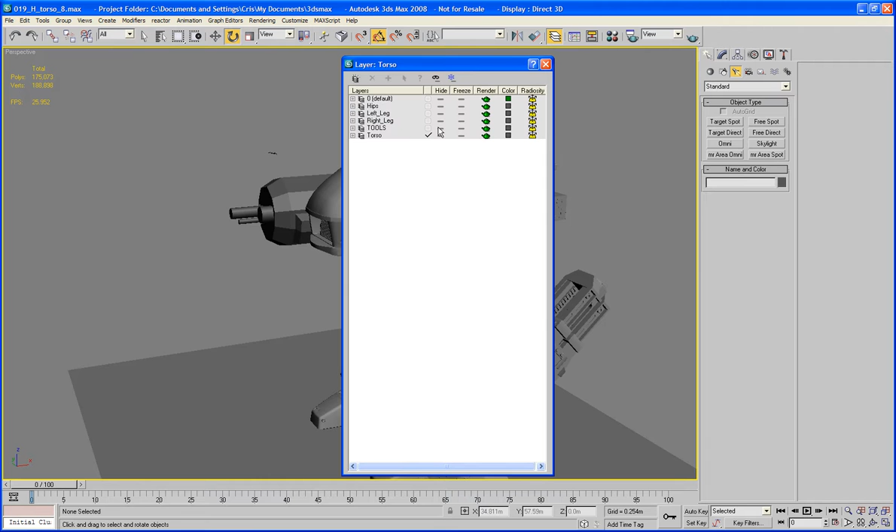Right, what I'm going to do is get started over here on the shoulder mount. For this, I'm going to need tools and the torso, so I'll just hide everything else.

Now these shoulders are probably going to get in the way, but I can just rotate them up and out of the way. I'm just going to work on this one anyway. There we go, now I've got plenty of space.

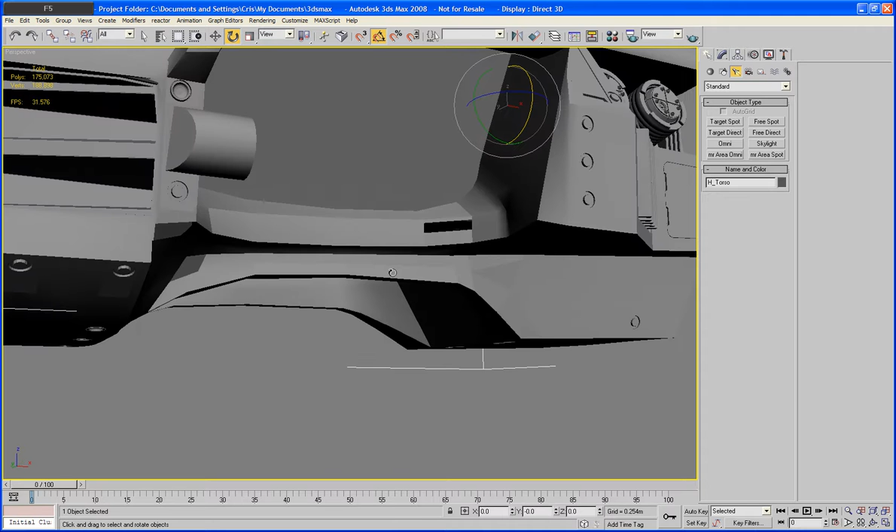Now, a couple of duff polygons in here that I want to fix. So I'll go there, cap it. Bet there's one on the other side too, let's have a look.

Huh, uncanny, there isn't. Okay, what else have we got here that might need fixing while I'm having a quick look around? Surely that can't be it. Oh well.

Now let's do a Control A and see where the red lines are. Well, there's one, and there's one for some reason. Ah, see, look, let's just cap that off.

3dsmax is being a little bit unresponsive at the moment, but it is a very heavy mesh, so... Okay, cap there.

Okay, now inside here... Ah, look, seems to have been an edge accidentally destroyed there as well. Just bridge that.

Okay, now what I need to do is go from here, which I'll cap, and extrude all the way to the other side.

Bring it across, well, to around about the optimal height, which is...

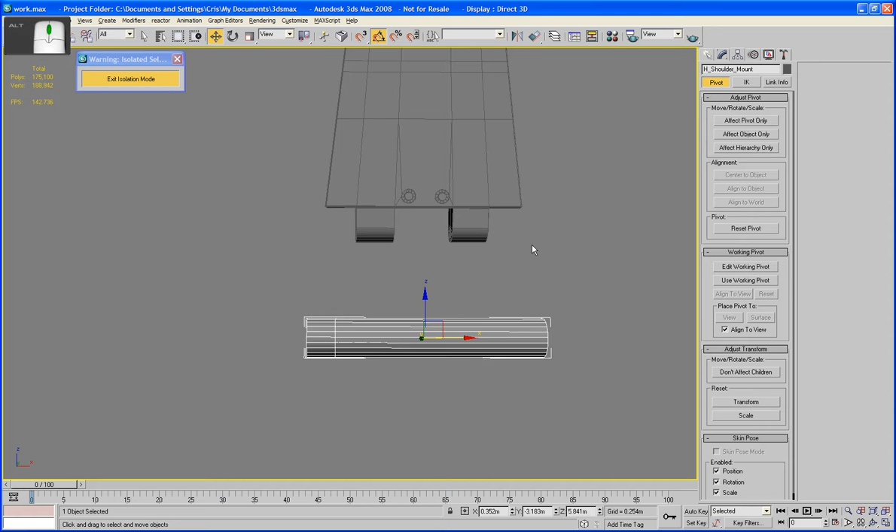Right, now I'm going to get rid of that there, do a backspace, get rid of these as well. There we are. Okay.

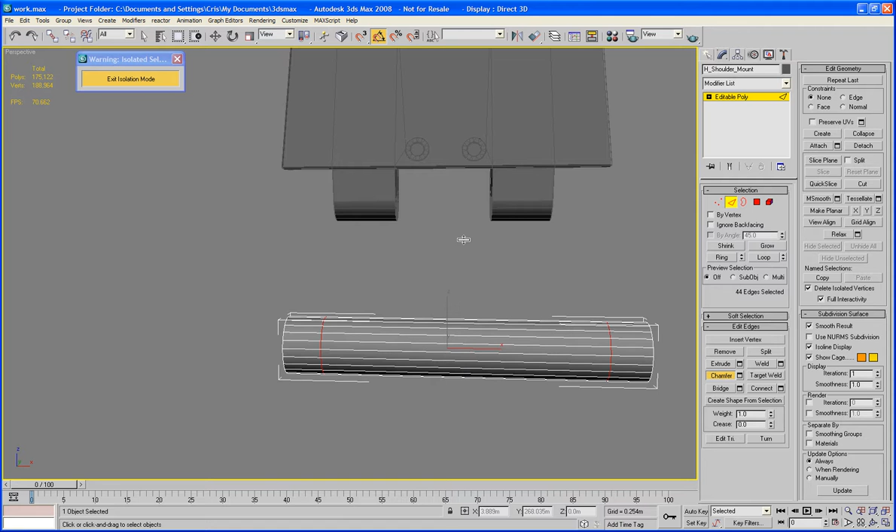Straight to the middle, connect, chamfer. Going to move these to about there.

Grab this, making sure ignore backfacing is on now. Extrude by local normal. Start bringing it in.

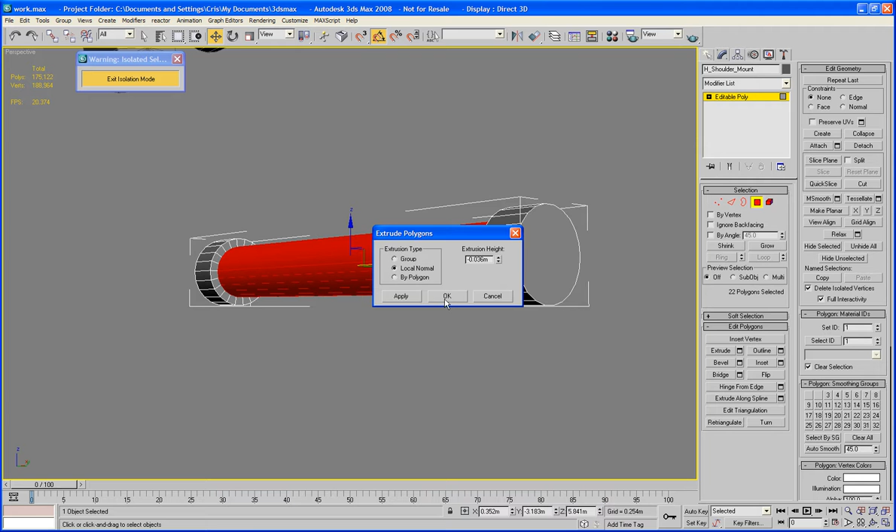About that far should do it. Click OK. Right.

Now it's a very complicated shape, this one, because some engine shapes and some mechanical shapes are pretty complicated. So I'm going to try and break it down as best I can.

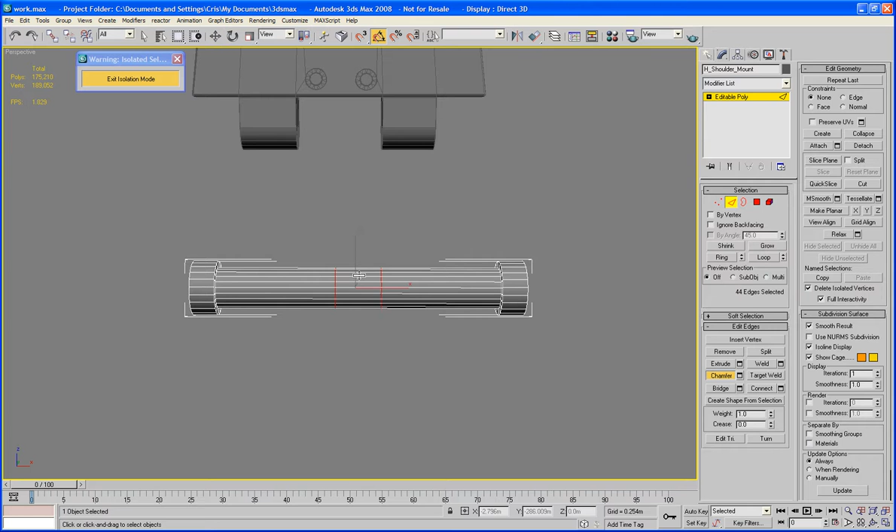So I'm going to grab that and do a connect, then chamfer it wide just to get to the kind of edge of where I'm going to be working from, which is our shoulder. So it's going to be about this wide.

Now I'm going to take out the middle part, and then over here I'm going to kind of work in symmetry really. I'm going to pull this part up to round about there. Click OK.

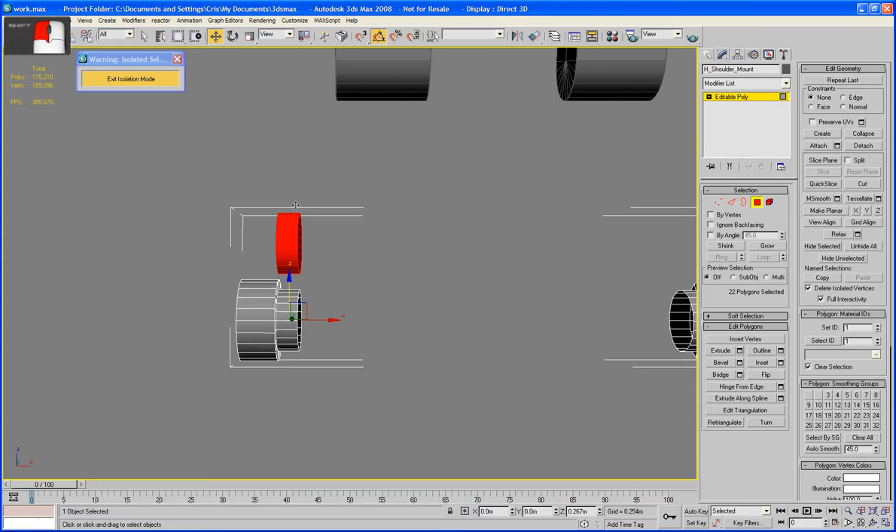Same again on the bottom. Click OK. So we've got these elements now.

Now I'm going to want to attach these elements together, which I can do via these polygons, like so. And then again the same one at the top.

Actually, let's bridge the bottom ones first. There we go. Now do the top ones. Okay, click bridge.

Now I can delete these off. Oops, wrong one. Okay, so already we've got this quite complicated shape going on there.

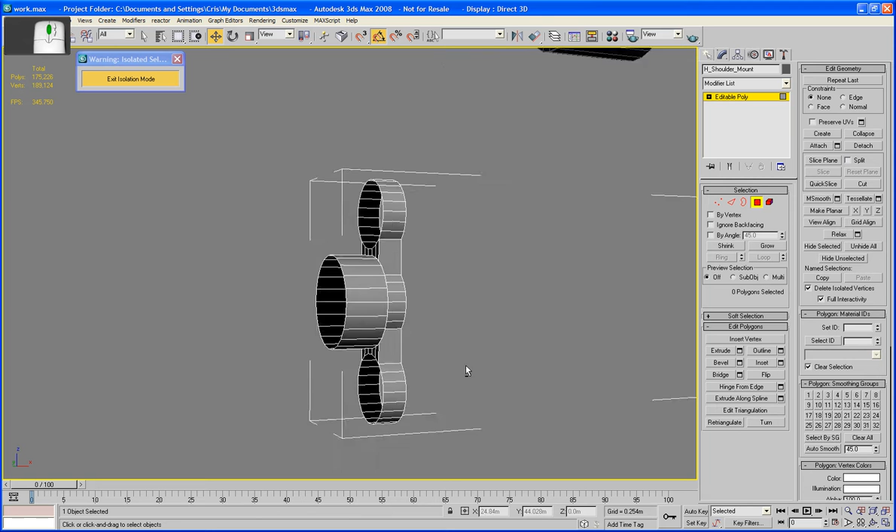Right, next. Just having a look at this. Go straight to the middle, do a connect. Straight to the middle here, do a connect.

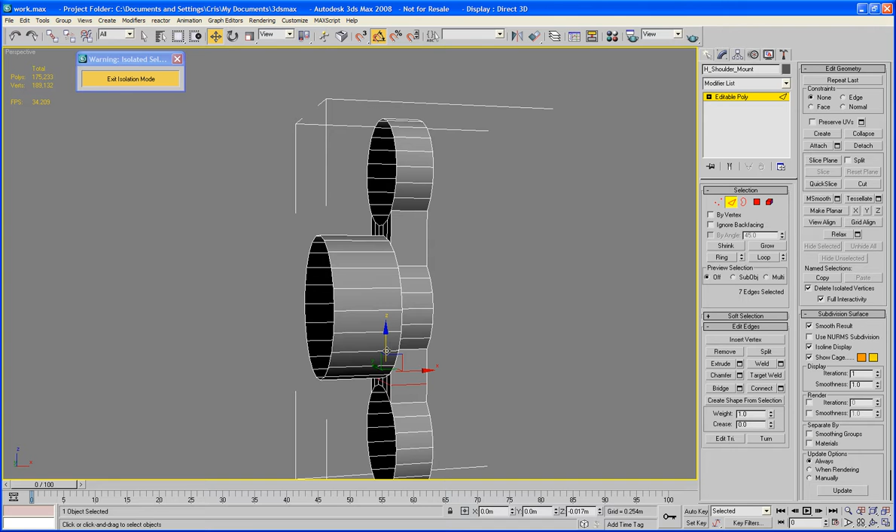Before I do, move this one down like that. Right, and that.

Now, grab these top ones and bottom ones, bring them back a little bit, like so. And line these all up together, so do that.

Okay. So we've got this shape now already.

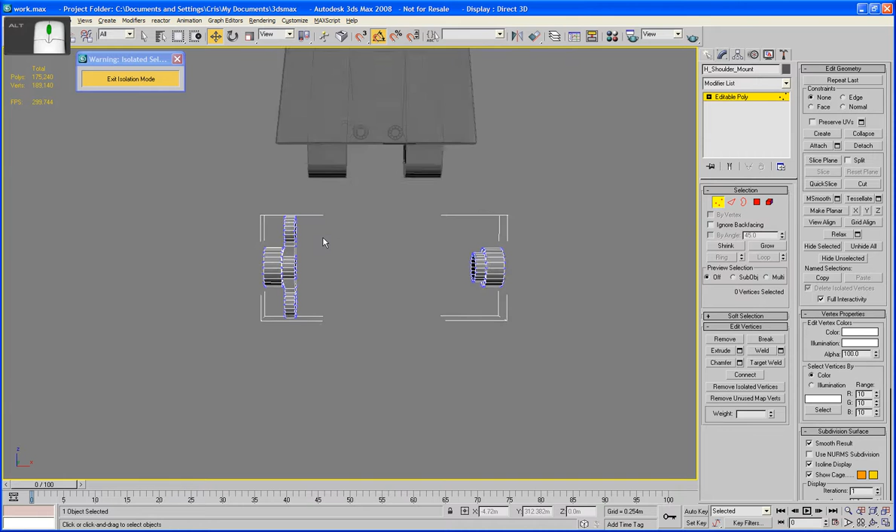Now in the middle of this we're going to have a gigantic cylinder disc, so I'm going to flatten this out, scale it on one axis like that, and then I'm going to build my large cylinder and just bring it out like so.

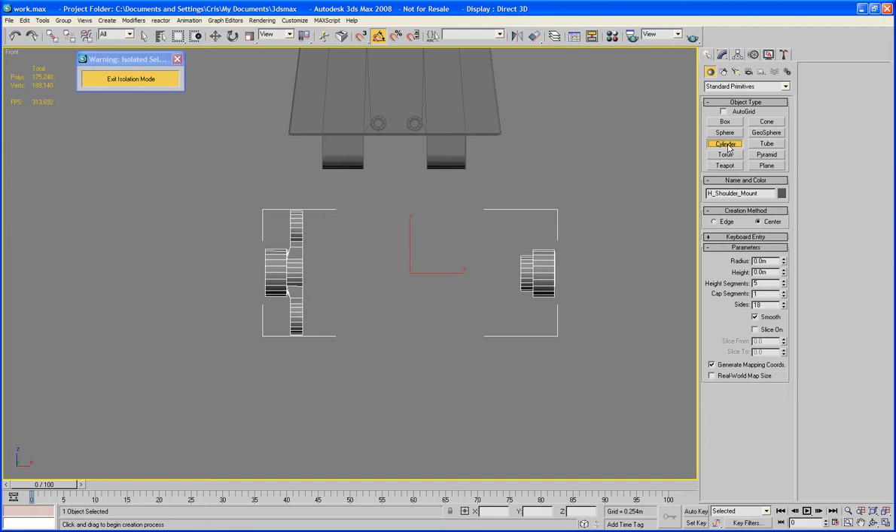Just need to get it round about the right kind of width. It's about there. Okay.

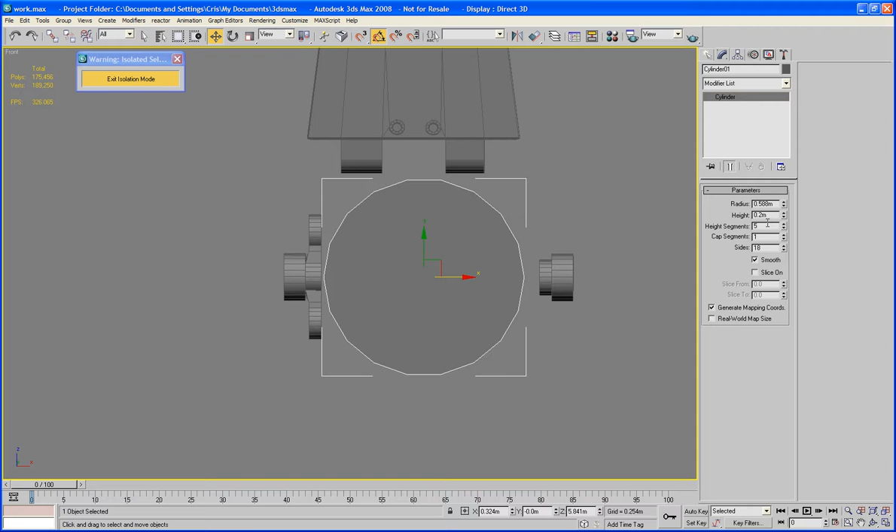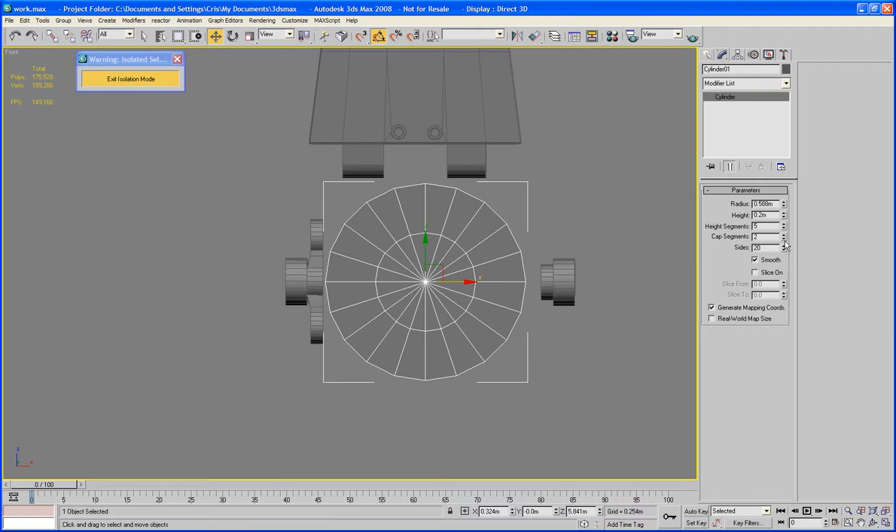I'm turning on cap segments briefly because if I take this down to 10 just to show you, there's going to be 10 bolts in this, and we're going to want an even space in between each. So if I make this 20 segments for the moment rather than 18, it'll be a lot easier for me to do this. I'm not going to bother with the cap segments right now, but I'm going to bring height segments down. I could up this to 30, but I think 20 will be okay for the moment.

Okay, drop into perspective and zoom. Bring that over to about there. I'm just going to work on the front for the moment. I can attach in the sides soon, but I'm not going to do it yet. Okay, this is in the right position as far as I'm concerned.

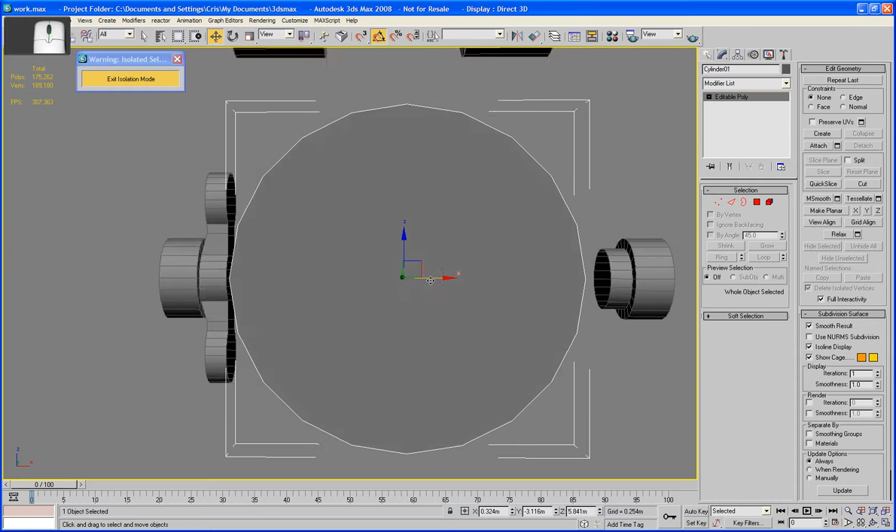So I'm going to get rid of the back piece. That'll leave me just this one. And I'm going to line it up. If you look, that vertex there is going to line up with that point there, like an arrow. I'll just put it there. See?

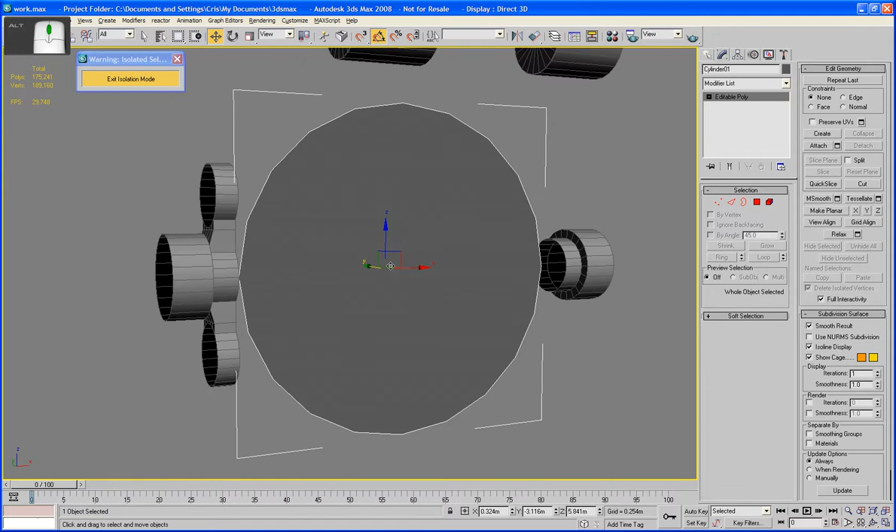Okay, now with this basic outer part here done, what I'm going to do is pull in an inset, not too far, just a nice basic one like that. Then I'm going to put a secondary inset in like this. Okay, that's cool. Right.

I'm going to rotate this. I need to rotate it 7.5 degrees really, I think. Let's have a look. Actually, I can probably just... there, look, 35 degrees will do it. Yeah, 35 degrees did it fine.

Okay, I'm just going to move this up a little bit, because I was going to get these to connect on the points, but, you know, I'm fickle. I'm not now. So ignore what I just said and taught you all about. What a terrible teacher you're thinking. Right.

Now what I'm going to do is grab this a bit like a cog. Okay, and I'm going to basically bevel this up.

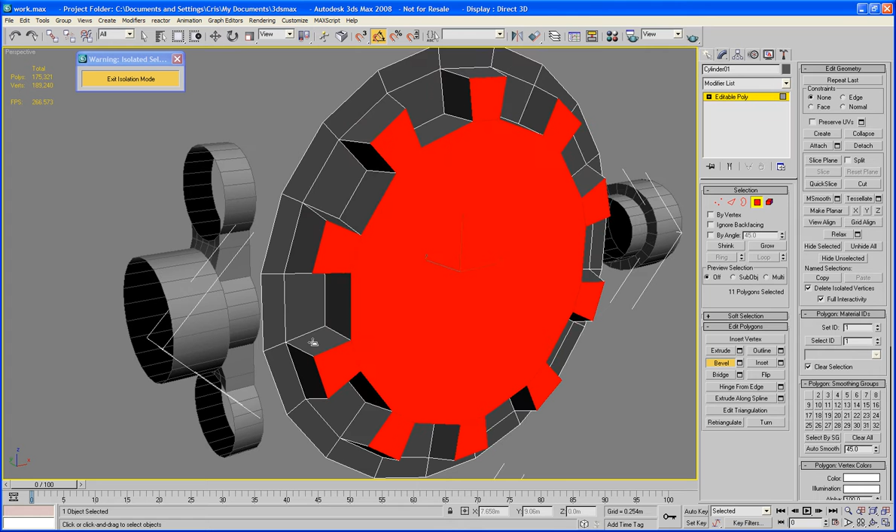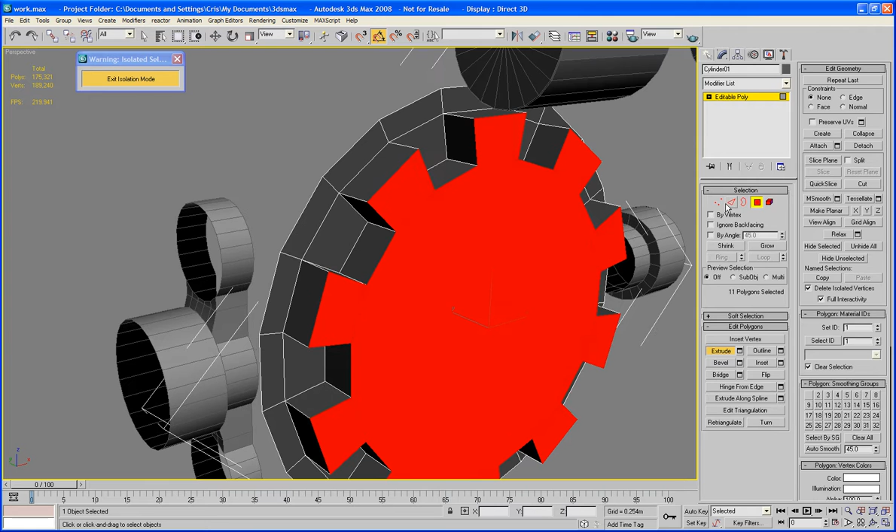Now, if you look, I'm getting that inset there, which really I don't want. So what I'm going to do instead is extrude it straight up like this. And then I'm going to manually chamfer these edges, and that'll give me the kind of curve that I want on these parts.

Before I do, I'm going to bring this entire section here up as well, while I think about it. Okay, make sure these are all selected. I don't need to chamfer them too much, although I probably will anyway, because you know what I'm like. Okay, one last chamfer, just a little one. There we are. Oops, that's segments.

Yay. No, I'm not going to do that really. Incidentally, if you're wondering, I'll just try control and Z. There we go. If I do my chamfer like this, okay, and put my segments in, I can also smooth it this way.

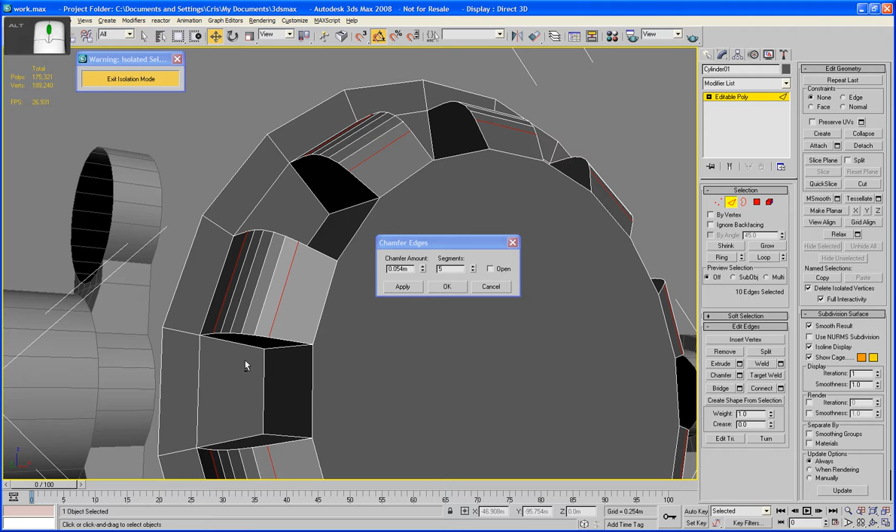I've been doing it the other way because some variations of Max don't allow you to. So if you want to do it this way instead, you will obviously get a more even result. You're going, I can't believe he's waited until part 18 to show me that all my chamfers are so uneven. Yeah, well, now you know, okay?

Right, we're going to be putting some detail parts inside those as well. But first, I'm going to finish off this part. So a bit of bevel, just to there. I'm going to edge loop it just there, like that. Okay, bring it back in a little bit, and then out like that.

Like that. Okay, because I don't need the inside piece at all, really. We're never going to see it, so, you know, ha. Okay, now I'm going to do an edge check on this. But first, I'm going to add my tools.

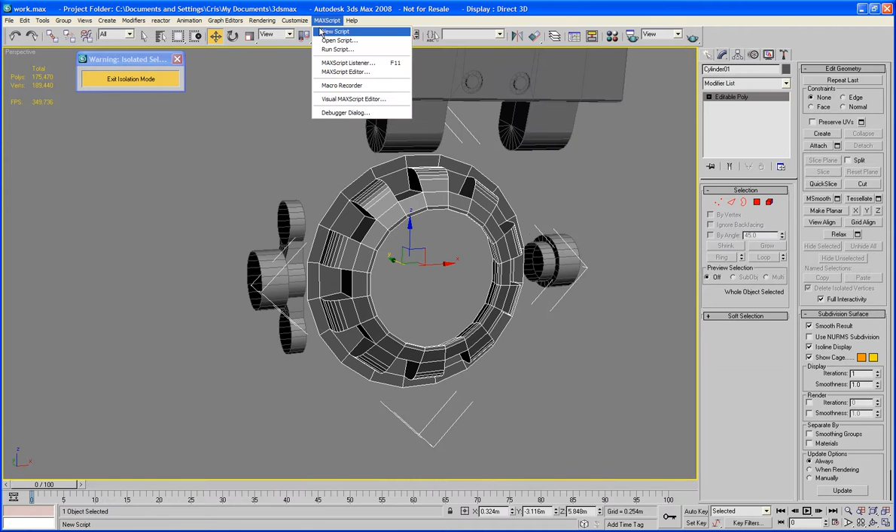So, Max script, run script, projects. Here we go. Exit isolation mode a moment. Just hide this one. There's our things over there. Hide this as well.

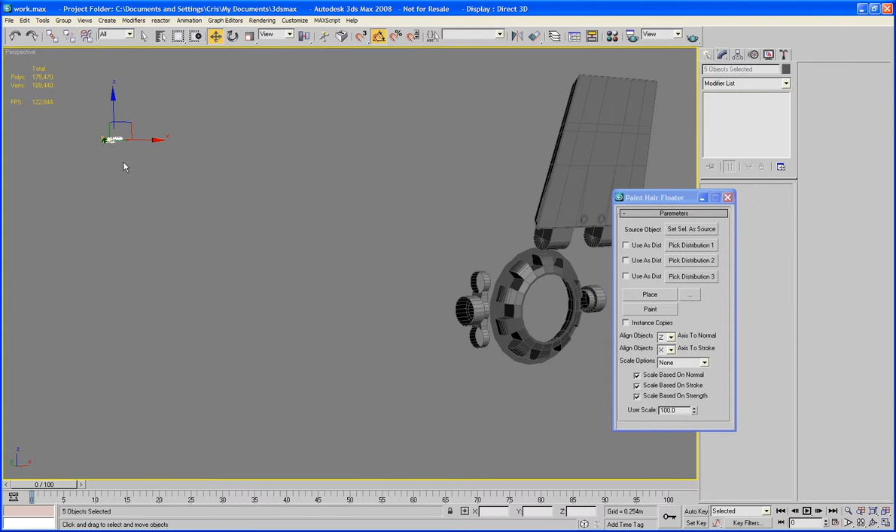And I'm going to be using... I think I'll use this one actually, I quite like it. So, pick distribution object 1. But just in case it's the wrong size, I'll use this one as well. There we go. Right, now back to this piece over here.

And I'm going to set selection as source. Right, this is one of those moments where I paused for about 45 minutes to an hour because I had to do something quickly. And now I've got to remember where I was, but it's not hard. Right, so this is my source. I'll go into place and see how big these bolts I'm making are. Hey, they're nice, they're just the right size. And put them in the middle, all these.

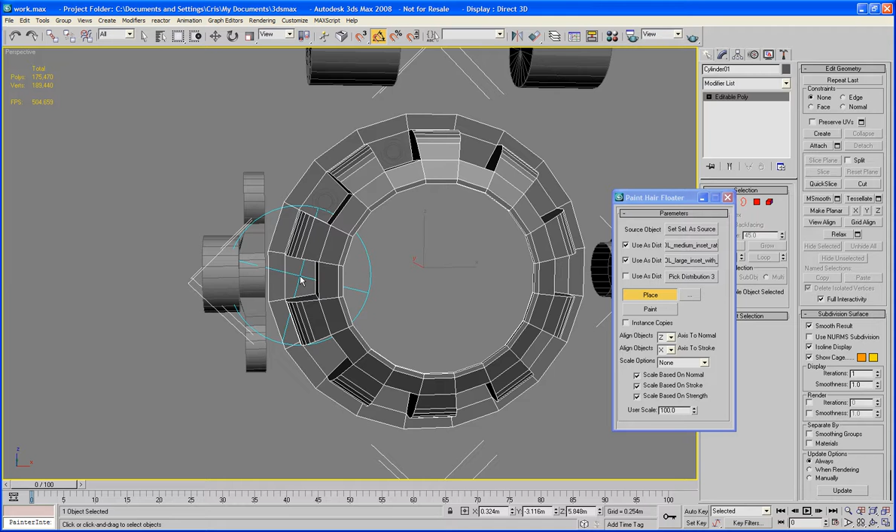Like this, and here. There we go. And then I'll turn off the placement tool and just minimize it.

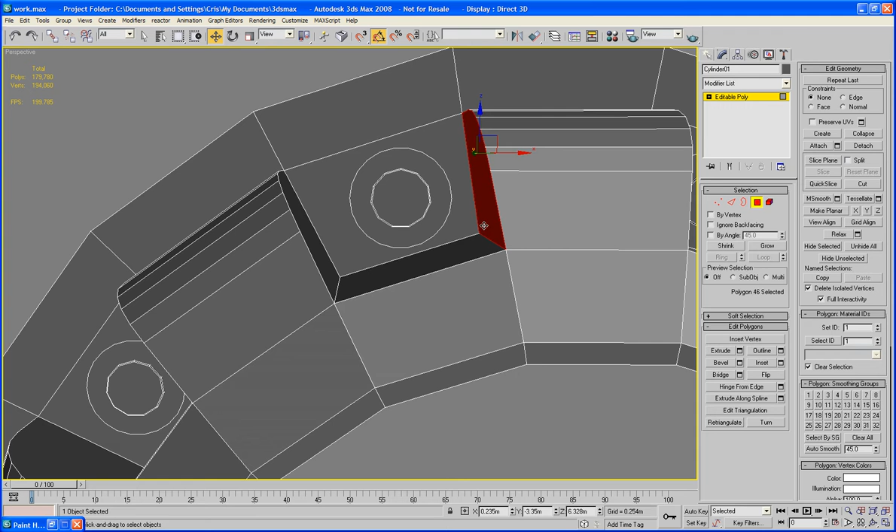And now, using the power of attach. 3, 4, 5, 6, 7, 8, 9, 10. Okay. Come on, delete, you rascal. And now I can bridge that.

And that. Have I got two objects here? It looks like I've actually placed two. Yep, I did. Placed two on top of each other.

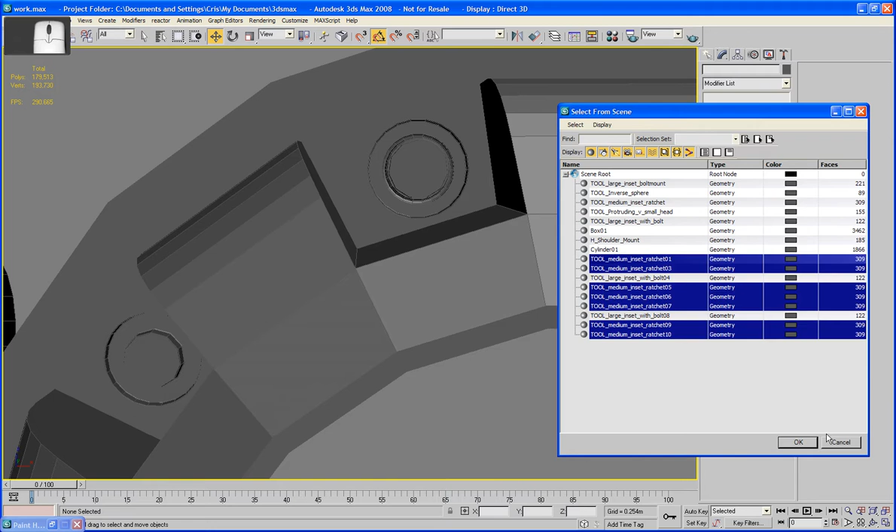In fact, I think I have my placement tool set so that I've put all these blooming ratchets in by mistake. So ratchet, ratchet, ratchet, ratchet. Yeah, I have. So let's detach these.

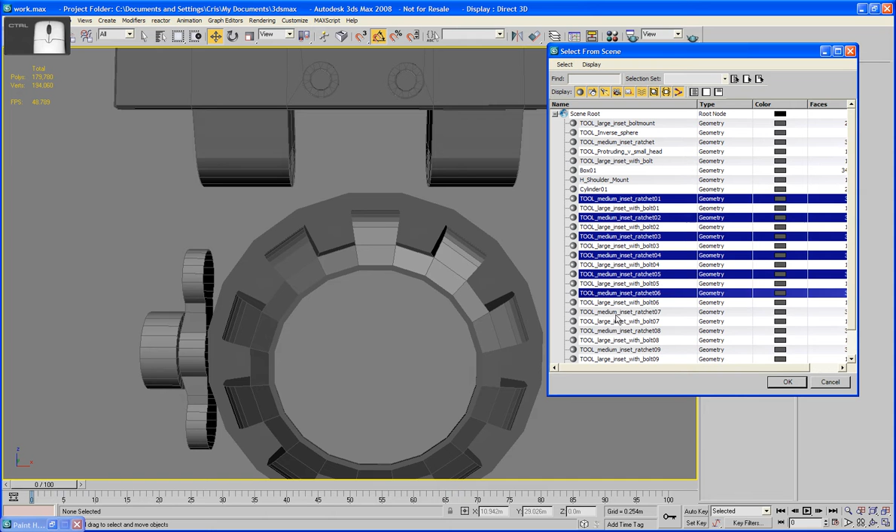Okay, H. And decide which one I'm going to keep. I'm going to keep the inset with bolt, I think, rather than all these ratchets. There we go. Get rid of those. Right.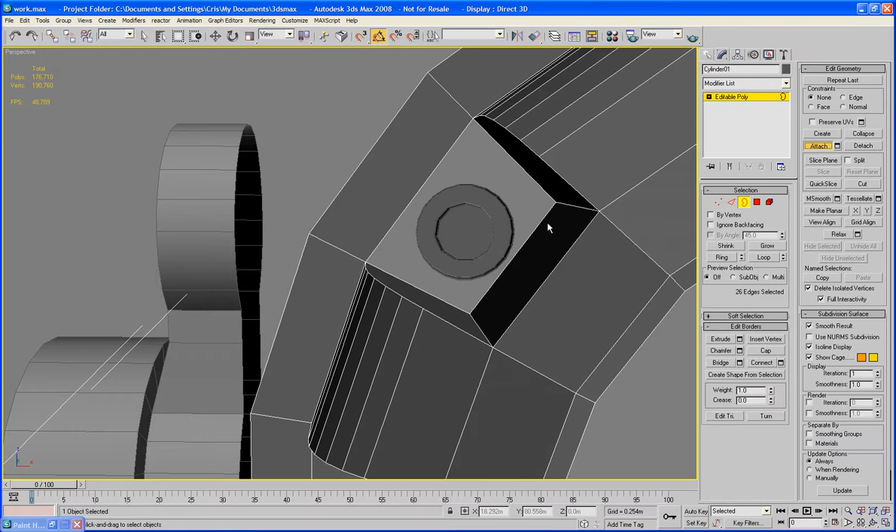And bridge. Do the same again over here, and I'm just going to start using a few shortcut keys. Not many though. Bridge that. It'll only take me a minute to do this.

In fact, I'll do all the deletion first, and then I'll do all the attaching. There we go. Okay, bridge.

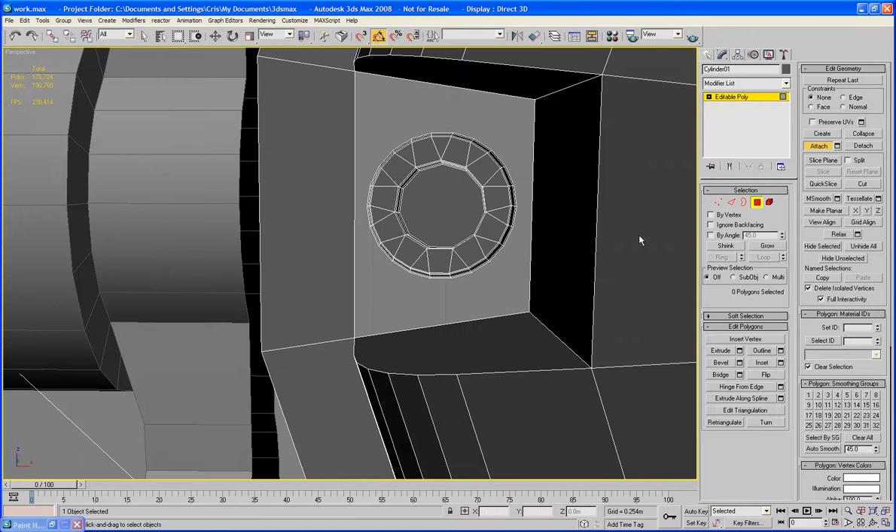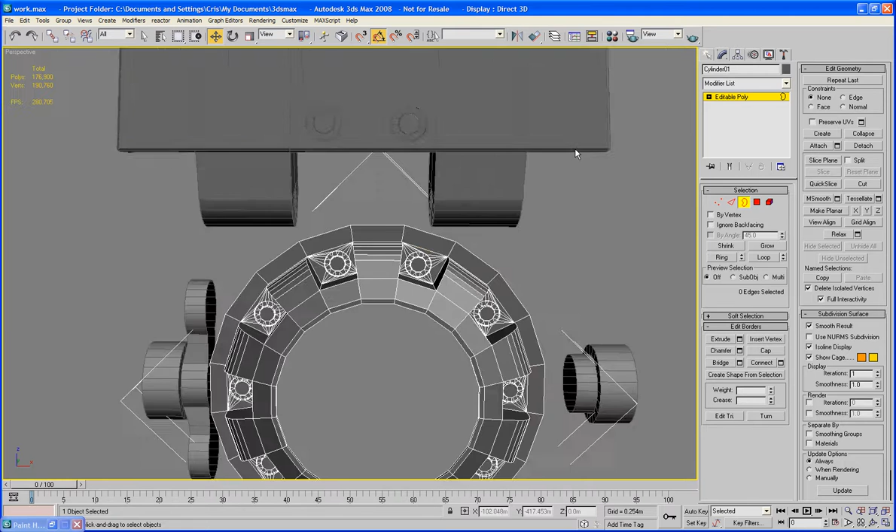Nearly done. It does speed up our process doing it this way though. Okay, zoom and have a good look at it. Yep, that's quite nice. Attach our basic material to it.

And then I'm going to do a quick EdgeChEx on it. So I'll do a quick save as well. Okay, and EdgeChEx.

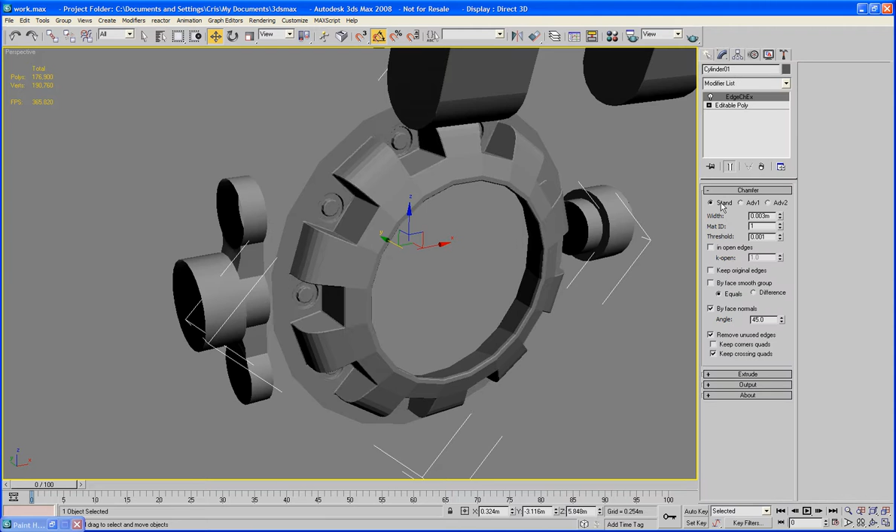Now I'm not going to use the advanced, I'm just going to use the standard. 45-degree face normal. I'll just reduce the width on them a little. There we go. A little bit more. There, that should do it.

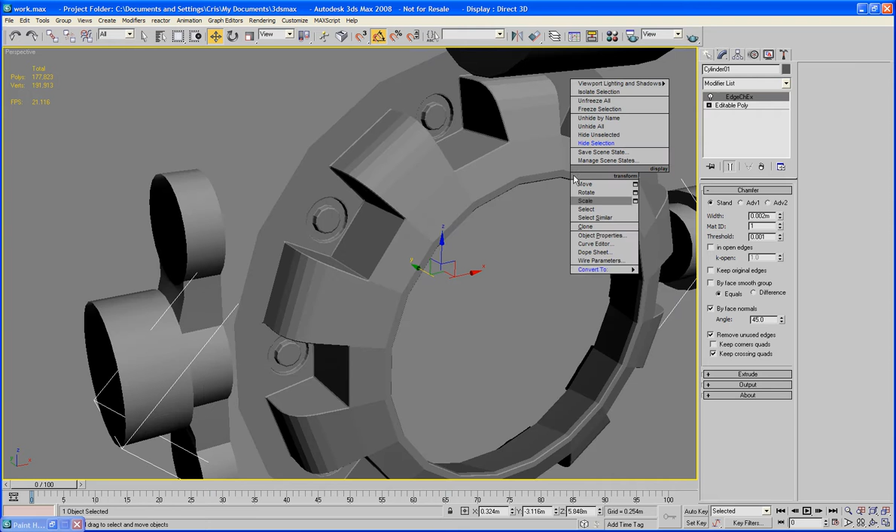Collapse that out. Now we've got this nice shape here. So what I'm going to do, bring that to there, maybe just a tiny bit more. Okay, next.

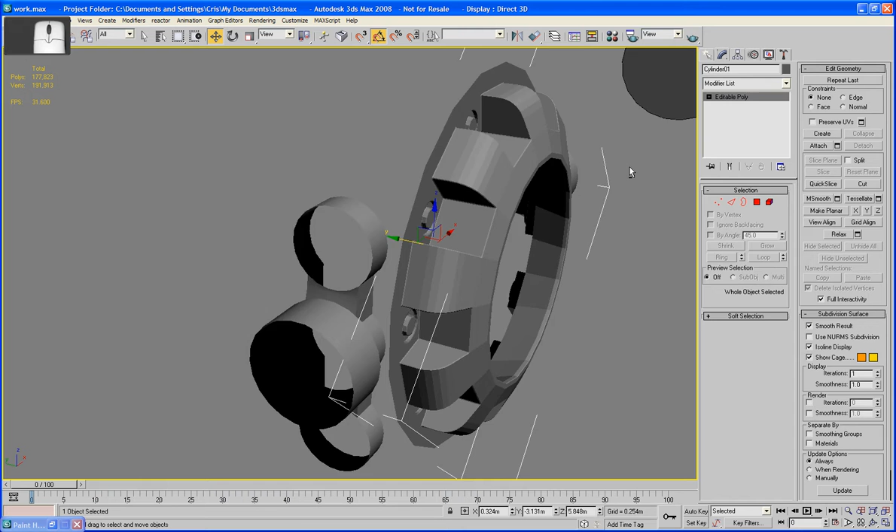I'm going to commit this to symmetry. That is that. It's been a long day, so bear with me. Okay, and do that on the Z-axis.

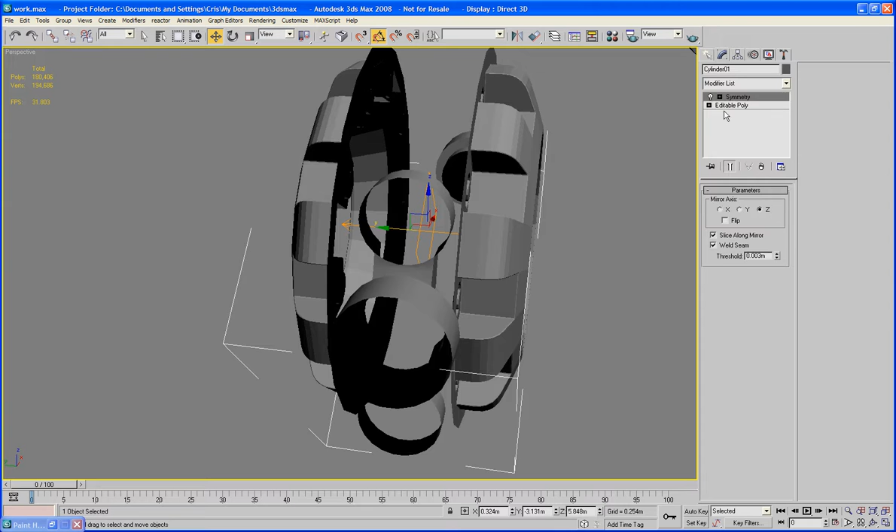Now, I thought I'd moved this. Oh no, I have, that's okay. Okay, so let's bring this in a bit. Just about there.

Convert to editable poly. And now I can bridge these two together. Like that.

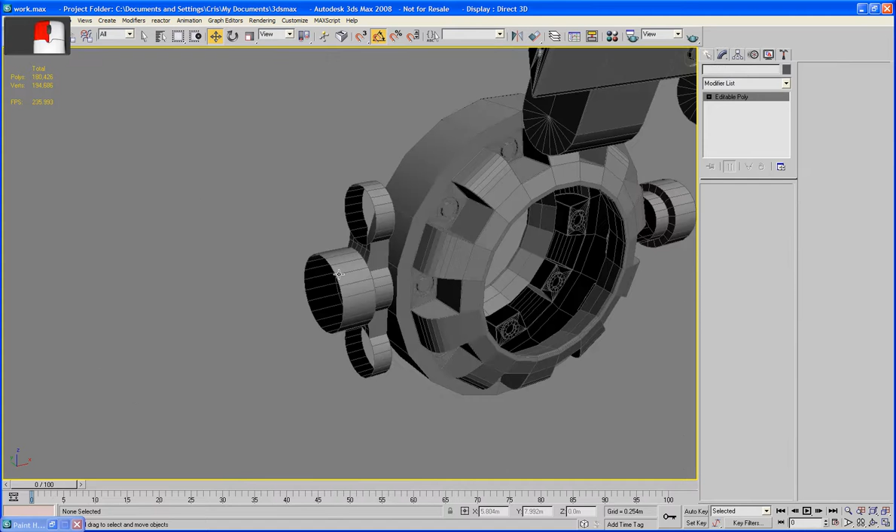Okay, now I want to basically sink these parts in. So what I'm going to do is attach it this way rather than the other way, so I keep my pivot nice and central.

First I'm going to move this one. Just to the point where it intersects, which is about there. Okay. Now,

Have a look at this. Yeah, I think this is actually going to work surprisingly well, so I'm quite pleased. Front viewport and zoom.

Now then you see this part here, so what I'm going to do is run a connect through this and just slide it down to around about there. Slide this one down as well. Okay.

Now I'm going to bring these across one at a time just so they intersect in. Bring this one to there. And just keep them going basically all the way through to here.

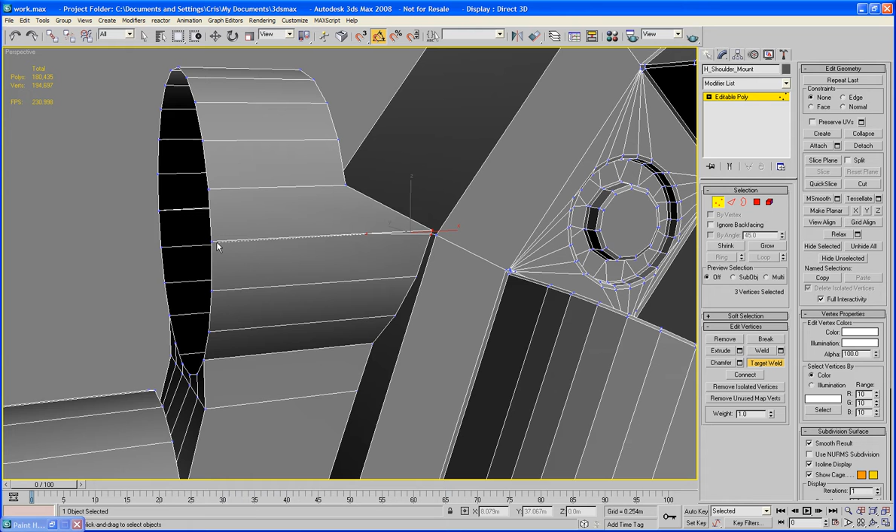Right, I'll go to my target weld. There we are. Right, now I can zoom right in on this again.

Okay, let's move this in. There we are, and this one as well. By doing this, you see, we break up this polygon rather successfully, which means it'll bend into the right position. Like so.

Let's move them all at once, actually. There we go. Just deselect it as it goes into contact. Oops, wrong way.

Gonna have to do the thing again for the bottom, so there we go. And this one. There we go. So those are lined up nicely now and the way that I want them. So now I get to do the same again down here.

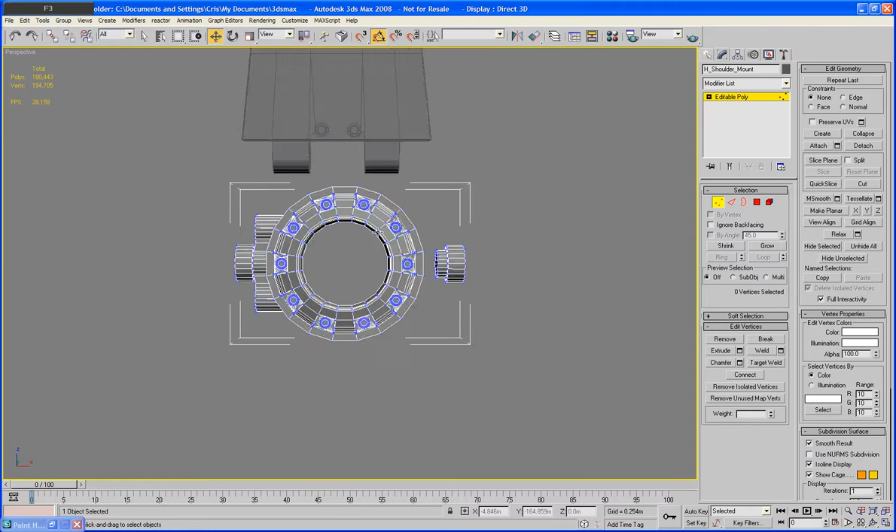Right, as you can see, we've put these pieces now where they need to be, and we've still maintained the shape, which is good.

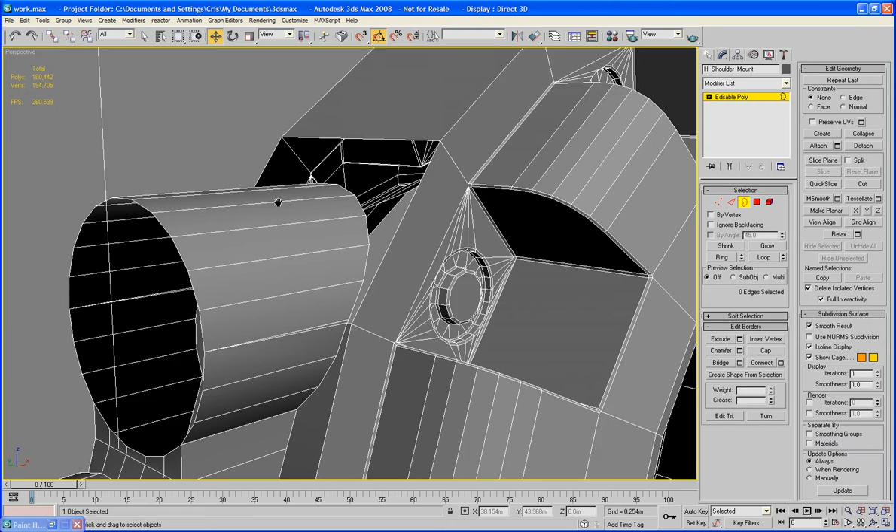So if I delete this, I can then... you see this won't select by cap yet. I can then, let me see, grab here and here, and bridge it. And I think I'll target weld this one out, actually.

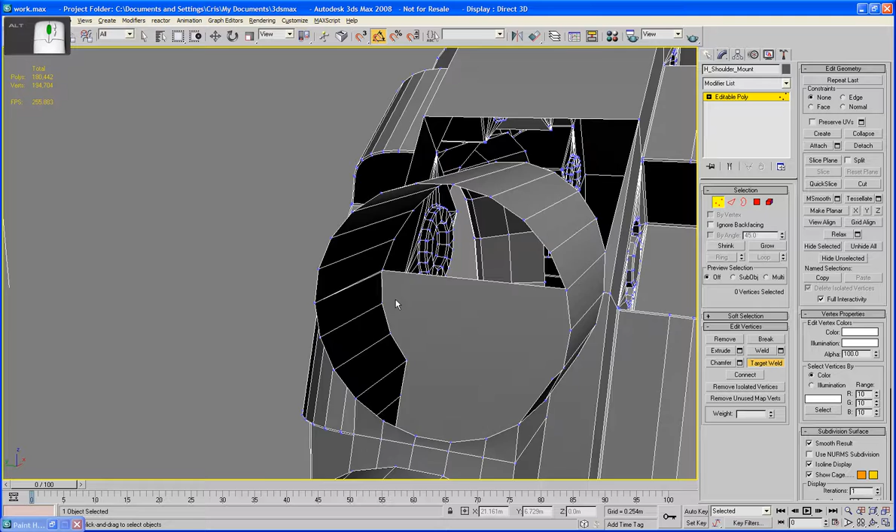Wasn't going to, but I think it's so minor it's not going to be noticed. I'll do the same here. Okay, and bridge there. Because that's bridged, I can now cap this out. Okay, so that's connected in nicely and solidly.

Now I'll delete this one out. And again, I can use the same method, just here to here. Now, that one intersects a bit too much, which is no use, so we'll do it from up here instead, because we don't want that level of intersection across polygons - even though it looks neat, it isn't.

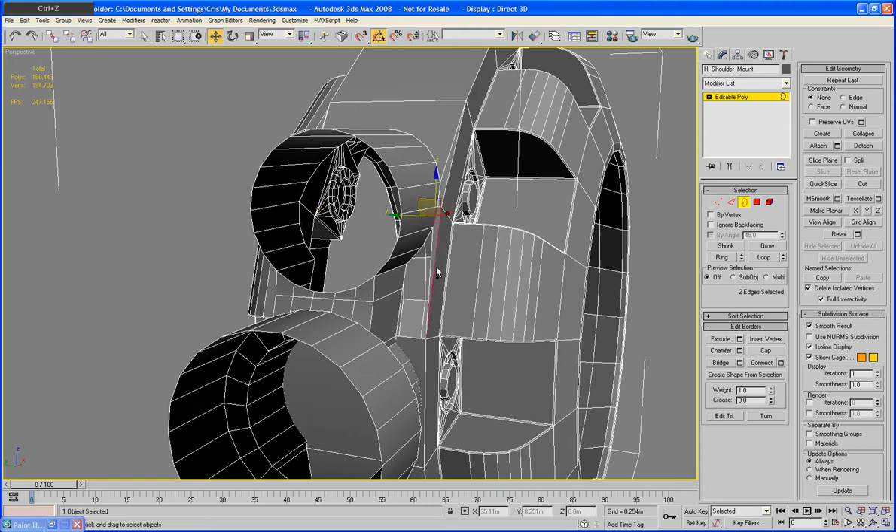There we are. Okay, let's cap these two. And it's gone right the way through, which is something it shouldn't have done. So let's undo these two and try to work out why it's doing that. I'd really rather it didn't. Ah, right, it's because this part here isn't bridged, so I'm just being dim.

The easiest way to fix that will be to do a cut from here to about here, same on the other side, and that'll stop our intersections going on. Okay, bridge.

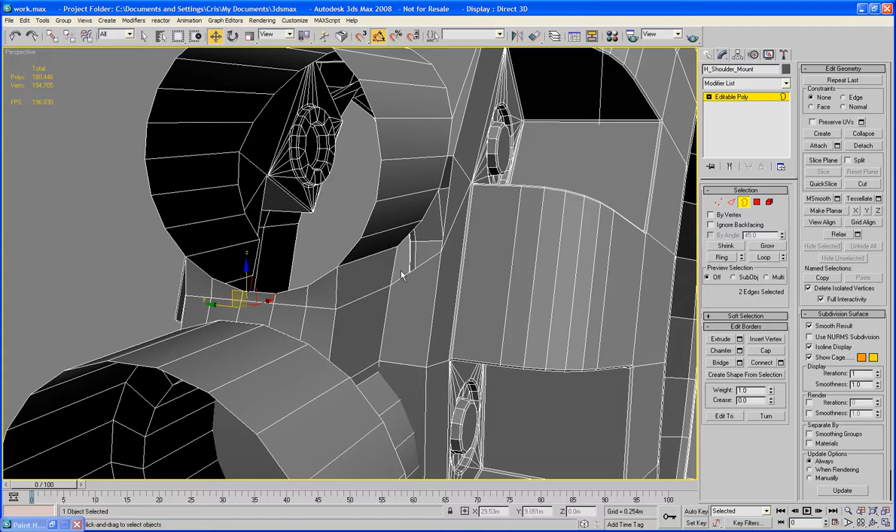And bridge. If you realised that was going to happen, then you're a smug git. Okay, bridge there, and bridge there. Hang on, not bridge there at all. You see, you didn't tell me again, did you? You're like, Cris, you're making a mistake, and I didn't realise. Okay, cap there.

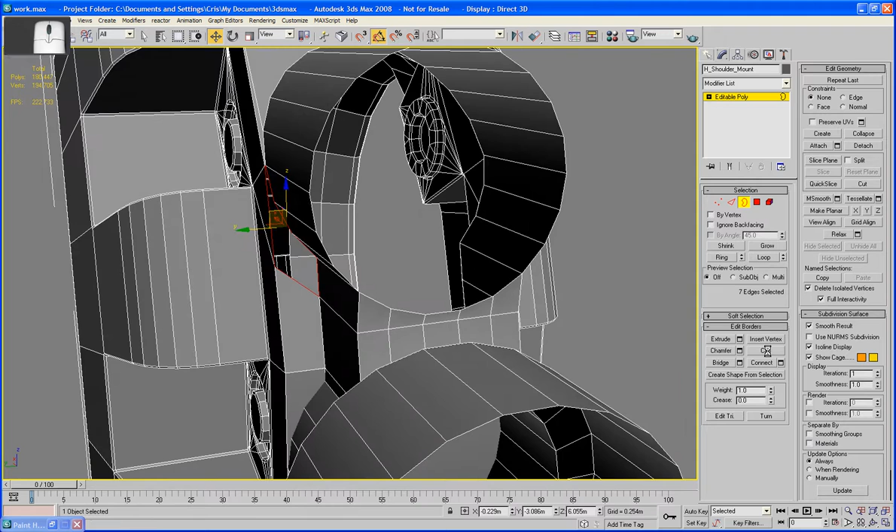Okay, now we've got to get this piece in, which shouldn't be too hard if we do the other ones first. So again, I'm just going to target weld this in. Wasn't going to, but, you know, sod it. This one doesn't even have one.

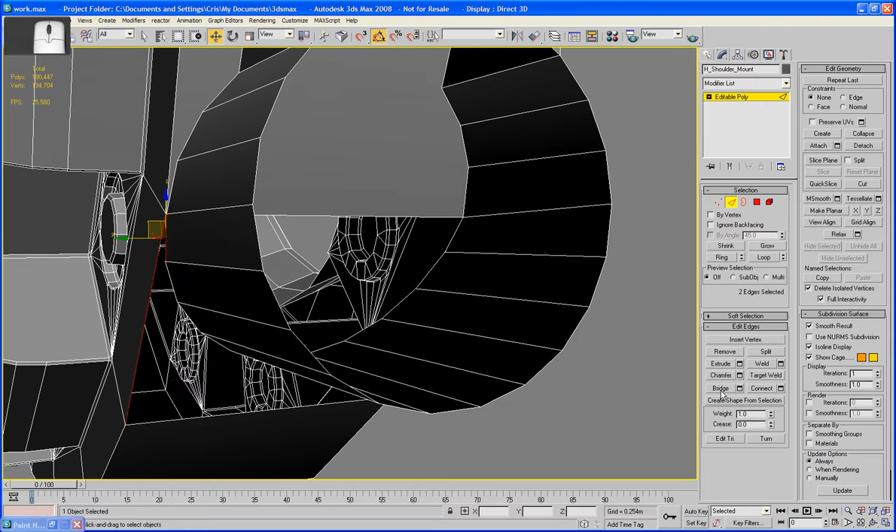Okay, bridge. It's a very small gap, but it is a gap nonetheless, as you can see. Okay, let's cap that out. And then we've got this one here.

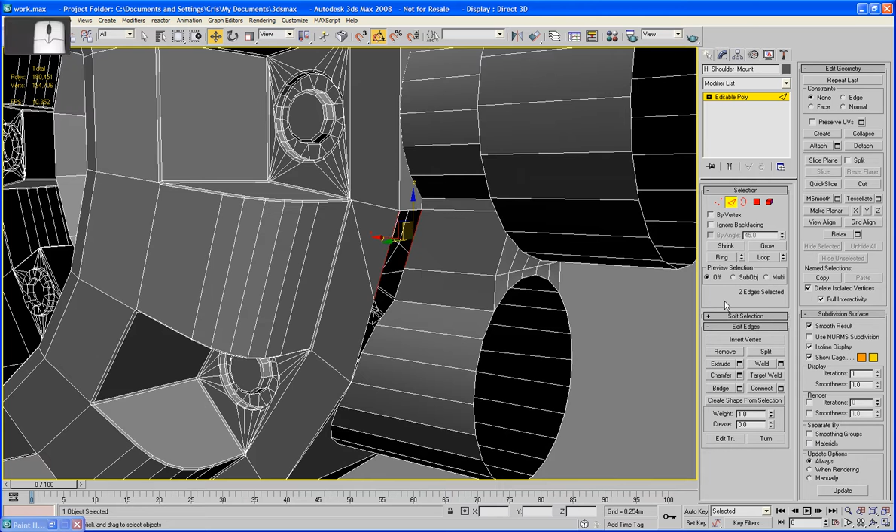Right, now I want to make mine here again, so do what I did last time. Cap it all the way at the edge. And again. Okay, bridge there. And there. And I'm going to cap these off. There and there.

Right, now I can delete this big polygon here. And then if you look, it just caps it straight off. 1, 2. Then I can cap these two tops here, here, and this one here as well. Okay.

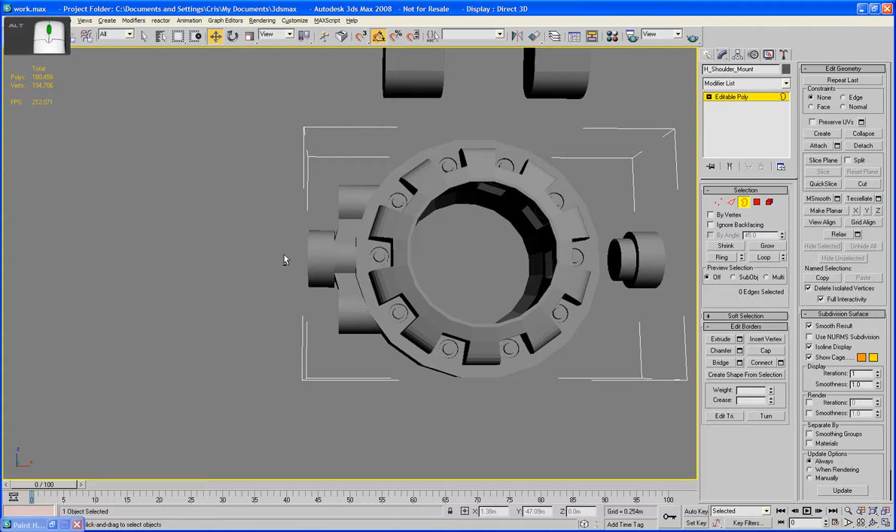You see how, as a really complicated shape - and it is - it's come together. It just needs patience, really, and a lot of time in order to be able to do this.

Okay, now I've got some time for a bit of beveling, so pull up a bevel, so the small one. Pull it in, like this. Remember, if you're not used to doing things this way, just take your time. You don't have to do it the hard way like I'm doing. Do it any way you think's going to work. There we go.

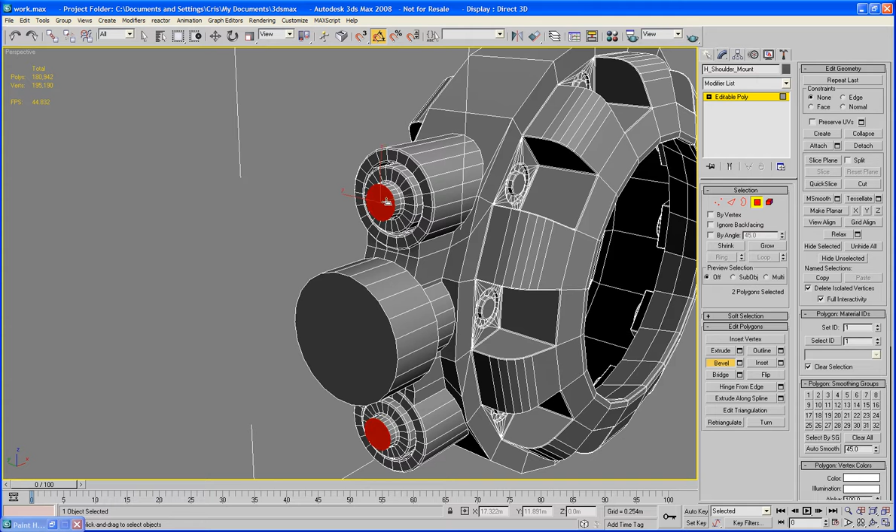The only reason I put my bevels in first is so that I don't have to do it later on with edge checks - even though I'm going to have to really for this double edge here. Or am I? Let's see if it loops. Ooh, it's so nearly looped. Just stopped here.

Twist it around the other side as well. I'm going to cut it in half in a minute and then symmetry it together again. So, a small chamfer.

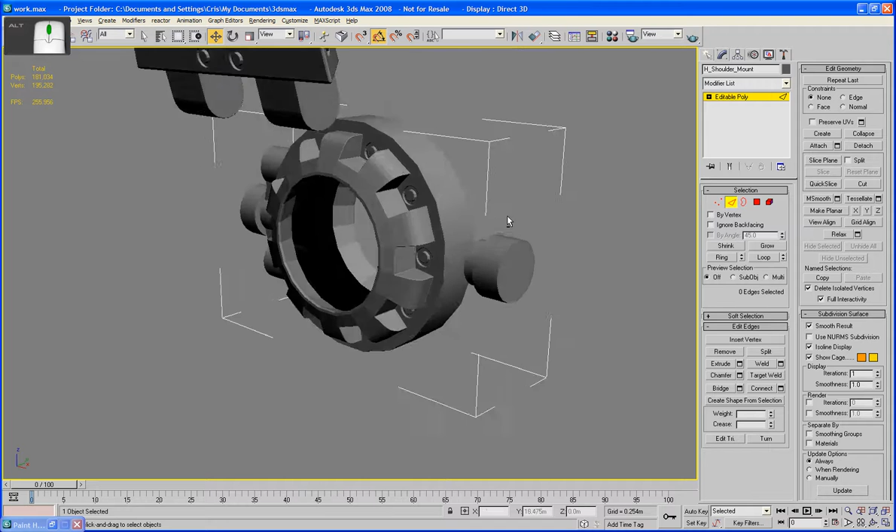Click OK. There we are. That works nicely. Now we've got some big gaps on the inside here. And what looks like... oh no, they're fine. I thought they were broken polys and they're not. So I'm going to select here and here and bridge it.

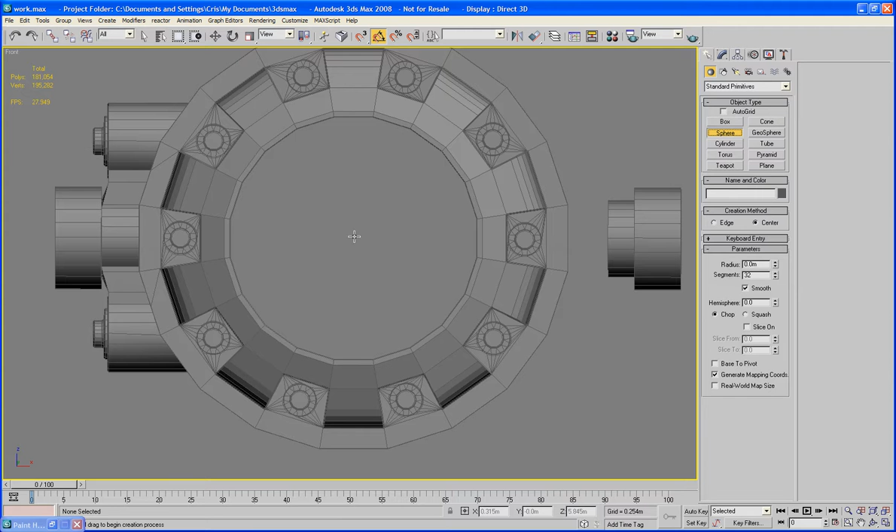Okay, now in the front viewport, I'm going to create myself a sphere, which I'm going to pull out like so. Okay, now move it here. Change it initially to 20.

Okay, let's get this kind of lined up a bit. Now go to the top viewport. Stick it right in the middle here. It's funny, it's literally fitting pretty well. Okay, now I'm going to increase the radius a little. Okay, that's fine.

And I'm going to break off this back piece here because we don't need it so much as we do at the front. And this will become the upper arm. Then add an H to that so I know it's the high polygon version.

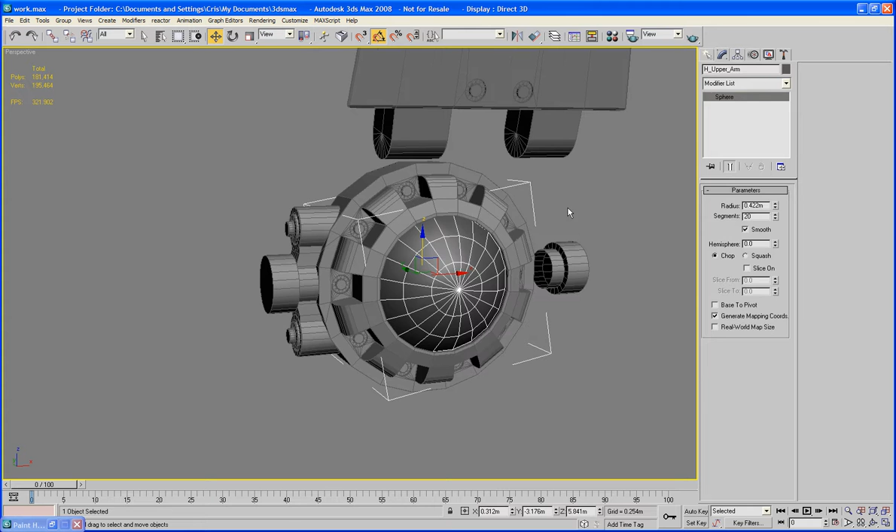There we are. And front viewport and zoom. Now do a quick connect down the middle of these without using any slide. And then I can delete these parts off. Okay, and do some symmetry. Flip it.

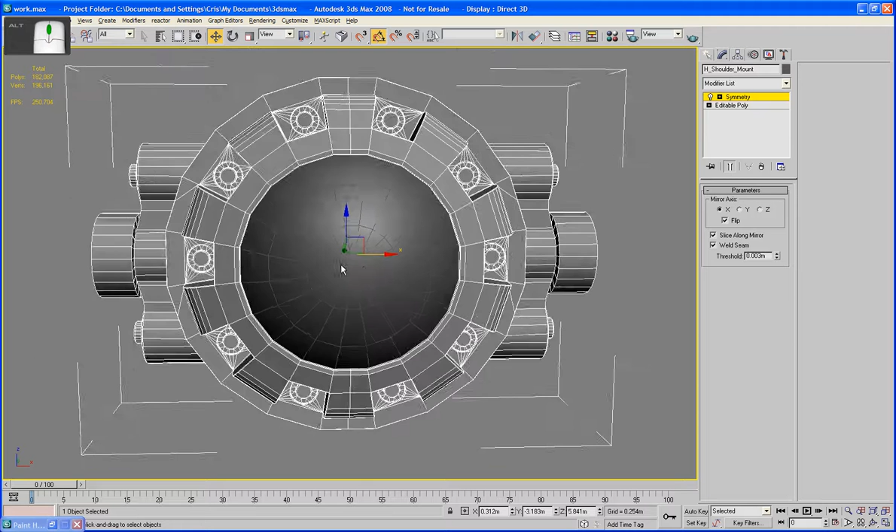Drop in a perspective and zoom. Okay, that's fine. Convert to editable polygon. Now I'm going to get rid of these lines here and here with a backspace. Front viewport and zoom.

Another one there, look, and it hasn't gone away yet. Right, now I'm going to get rid of these and these. Now then over here, I'm wondering if we've got a weld issue going on, because this edge is refusing to bugger off. Let's find out.

Easiest way to do it, of course, is just to cap it away. Then get rid of these inverts. Cap.

Now then. Seem to have lost a chamfer along the way, so I'm going to cut myself a new one. There we are. I see it, it's cut the wrong way. It's okay. Cut this one to here. And then cut this one to here. And then we can take out this middle one here. See? Chamfer's back, good as new.

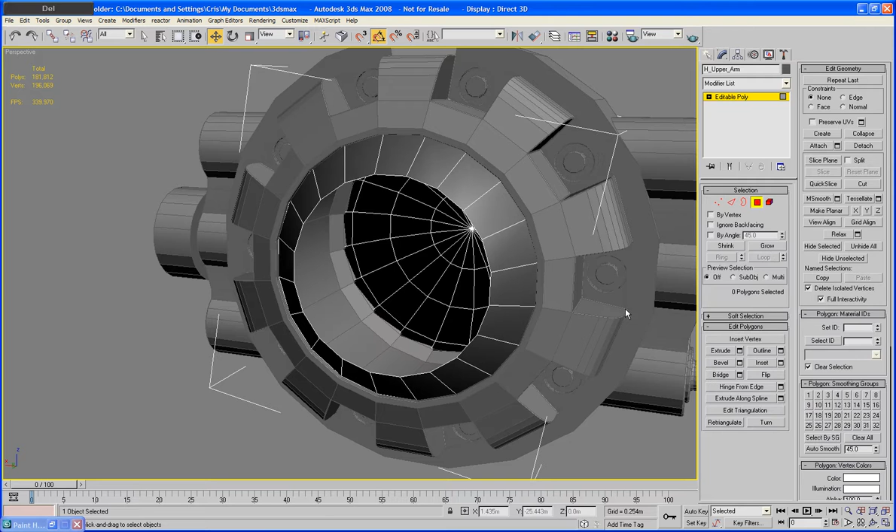Okay, now with this middle one here, I'm going to keep it at the moment at 20 segments, because that's all we need, like I said. At the back here, making sure it's converted to an editable poly. Just going to loop here, control select by, do that, grab it, then cap that. Because we don't need that much space at the back.

Okay, now I'm going to unhide all, which should just unhide this layer. Okay, there we are. Right, now, over here, where this is going to go in, I'm just going to extrude this part. Just like so. Then do a very small bevel.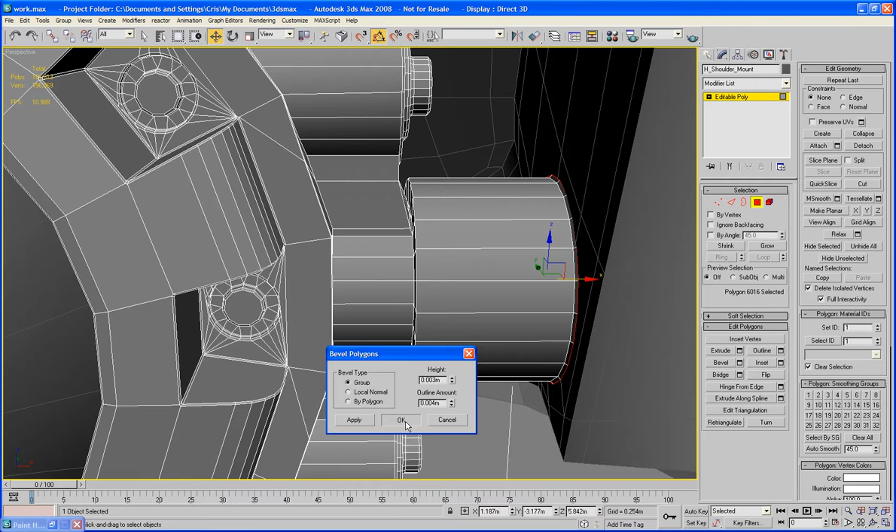Just bring it back in until it isn't quite passing through the wall there. Click OK. Right, so this shoulder is now the right height and in the right area, believe it or not.

Cool, it's actually orbiting around the shoulder, which is quite fun. So that's the actual position it'll be in when it's being used. I love doing these sort of things.

Right, so what I need to do now is mirror it onto the other side and also bring this down to about there. Make sure they're even. Now, I did some changes to this side that didn't go through onto the other side, didn't I? So I should mirror this as well. This was in the last tutorial, so I may as well do it now.

Ooh, but I can't because of these back pieces. Let's see what I did. Oh, it was this bit here, look. Let's just grow it. I knew there was something. Okay, and I'm going to shift it across. If I don't, I'll just regret it later.

Click OK. Right, yeah, that'll do. Get rid of these bits without moving any. And bridge. Just make sure there's no bridge defects going on. There's one.

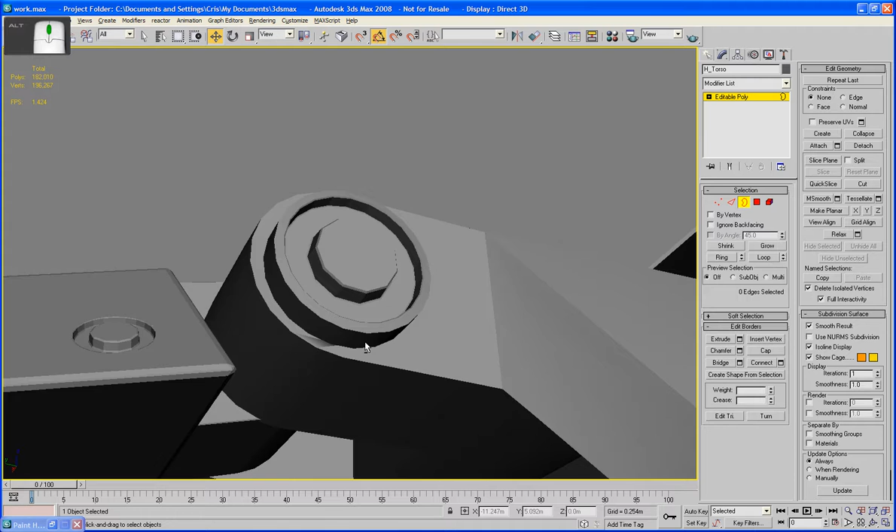There's no reason for us to take a defective bridging, so just delete it if you find you've got one. It's normally caused by basically not having the right number of polygons on the top compared to the bottom, or in the bordering area anyway, you know what I mean.

Okay, let's just recap these bits. I probably discussed this the last time that I did this, but I can't remember, to be honest, so there we are. Okay, that worked nicely.

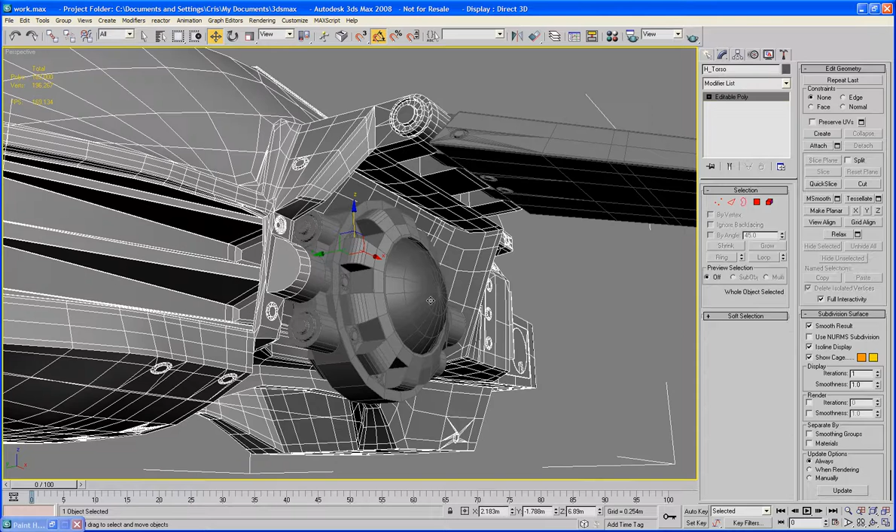Now, I'm going to take these items here and attach them temporarily. Actually, no, I'm not going to attach them. I don't see the point. I'm just going to mirror them.

Let me see, mirror, whilst copying on something like the y-axis. There we go. Now I'll drag it across into the right position, which should be about there. Yep, it is. Okay, now I'm going to reset these two bits,

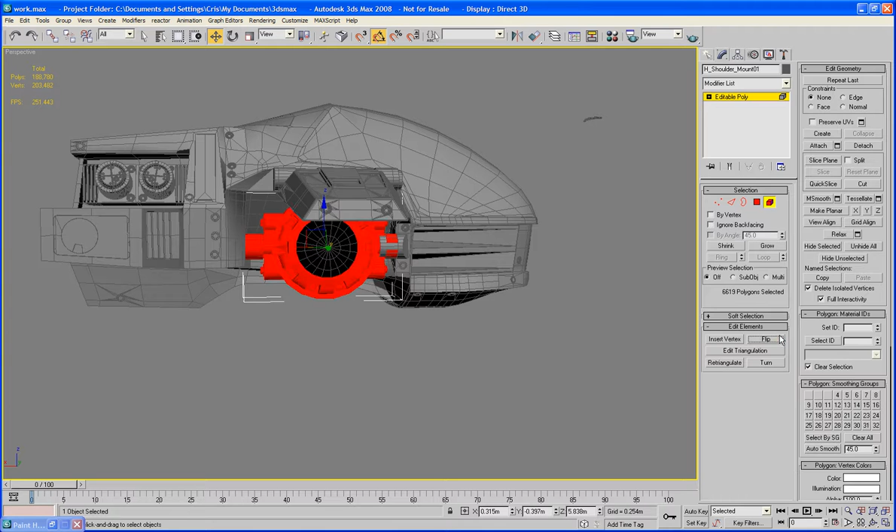Right, and let's unhide all the parts. Just so I can look really happy about what I've been doing. Cool.